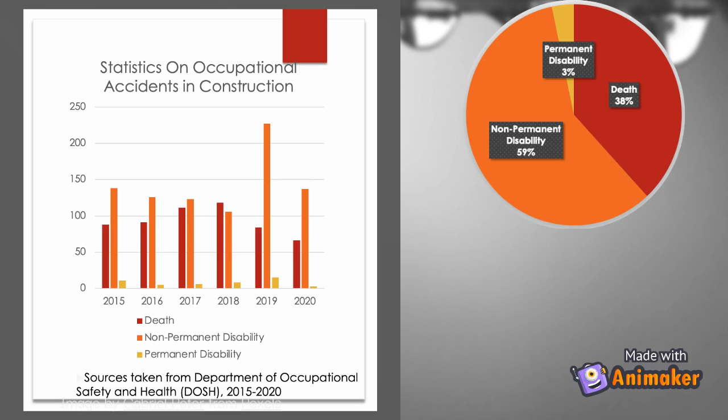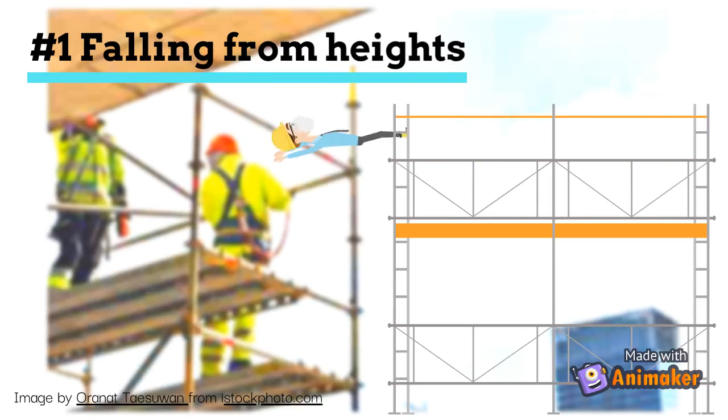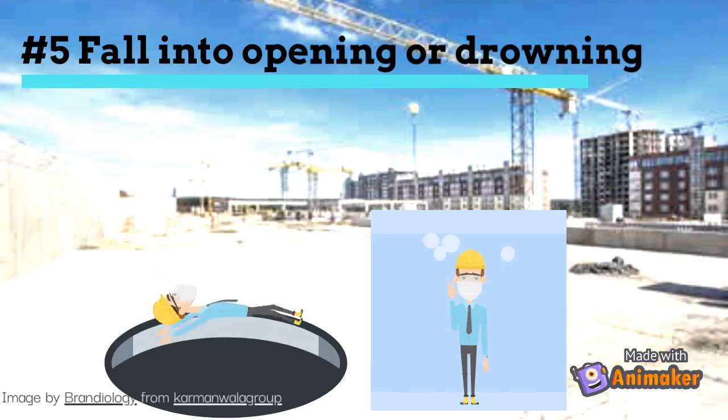These are the 5 most common construction accidents in general, sourced from the DOSH report. Firstly, falling from heights. Secondly, struck by falling objects. Thirdly, struck by moving objects or vehicles. Next, caught in between. And lastly, falling into an opening or drowning.

Here we look at the other 4 common accidents that happen at construction sites, namely electrocution, environmental factors, fire, explosion, and exposure to or contact with harmful substances.

Despite the effort of implementing rules and regulations on site safety according to international standards and guidelines, the number of accidents does not seem to reduce significantly. So what actually are the main causes of construction accidents?

Firstly, workers' negligence. Workers who act carelessly and fail to carry out site works, such as operating machines without observing the working surroundings, may lead to workers being struck by moving objects or vehicles. Workers' failure in taking care of equipment and tools may lead to workers being struck by falling tools from higher platforms. Therefore, being cautious and responsible is important at construction sites to ensure other workers are not harmed.

Secondly, the failure of workers to obey work procedures, especially standard operating procedures when handling machines or entering the construction site. Accidents can be avoided if every worker obeys the stated SOP.

Next, working at high elevation is one of the main causes of accidents in Malaysia. Working at higher platforms such as high-rises, highway bridges, and slope construction has a higher possibility of accidents, and any mistake could cause falling from high elevation. Most fatal accidents happen due to this factor. It is compulsory in the guidelines that workers working at higher elevation require personal protective equipment to ensure their safety, such as safety belts and harness safety lines.

Therefore, a safety management system, which is a systematic way of identifying hazards and managing risks relating to the construction workplace, should be introduced at every construction site to ensure the safety of the workers and to protect the stakeholders as well.

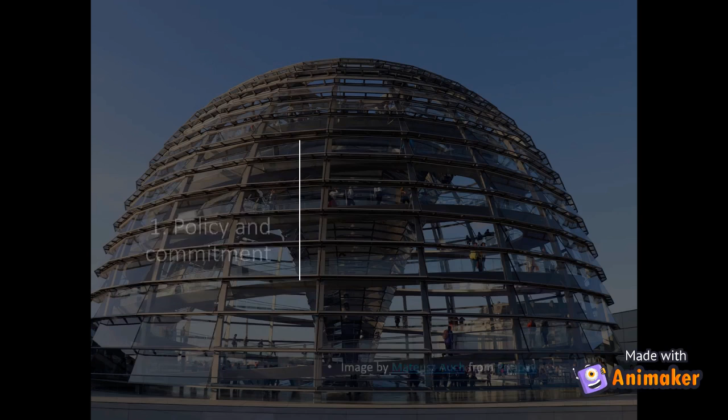Now we will talk about the key processes of site safety management. The first key process of site safety management is the establishment of policy and commitment.

Safety policy is a recognized written statement of an organization's commitment to protect the health and safety of the employees as well as the surrounding communities. The safety policy outlines the measures taken to protect the employees.

The policy shall always prioritize the safety of the workers in all works at site. Commitment from all members of the organization and team in regards to safety and health prioritization, as well as compliance to safety codes, shall be guaranteed 100%.

Safety policy shall minimally be formed with the following three sections: Number 1, statement of the policy, stating the employer's commitment to manage health and safety and stating the goal of the policy.

Number 2, responsibility, which is the appointment of a responsible manager and his team to implement, enact, and track the implementation of each element of the safety policy.

And number 3, outlines of detailed procedures or standard operating procedures (SOP) of all forms of works where hazards are involved. As there are many safety policy and procedure modules involved, some of the key ones may include confined space policy and confined space entry procedures.

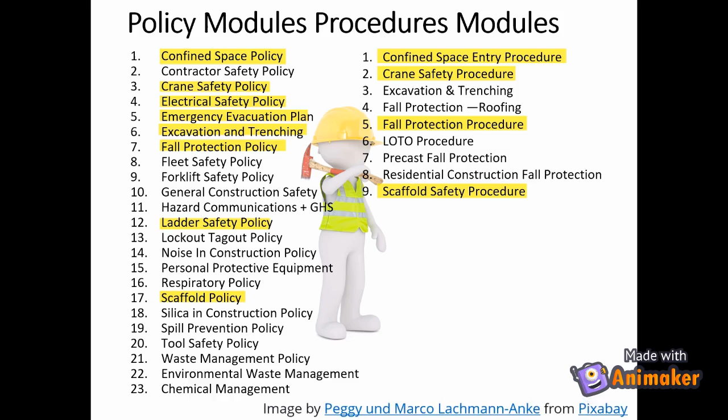The second key process of site safety management is planning. While the safety policy and SOP in key step 1 may be standard across several projects in the organization, a detailed plan formulation is required to fulfill the safety policies.

Some of the key information that needs to be sorted out during the planning stage of the site safety management process may include, but not limited to, the following: A, the nature of the project and its risk levels.

B, the available site topography drawings and structural information. C, a soil test result.

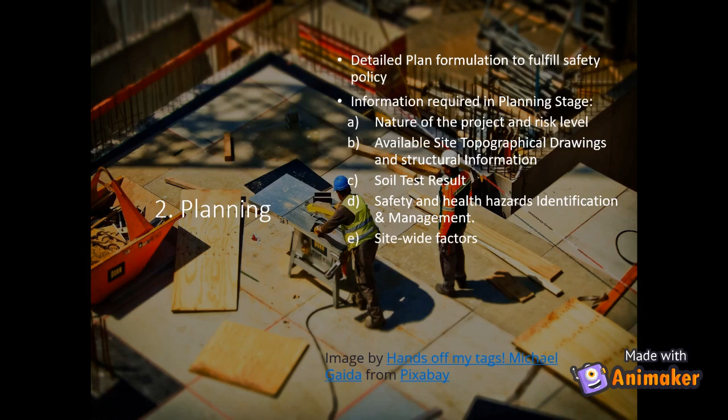D, the safety and health hazards identification and management. E, site-wide factors such as the nearby schools, terrains, railway or infrastructure, etc.

The information of the planning shall mainly be derived from the client, who owns a specific description of the site hazards or surveys, or the designers or engineers who assessed the risk of the site during their design and needs to cascade the necessary information to the main and subcontractors.

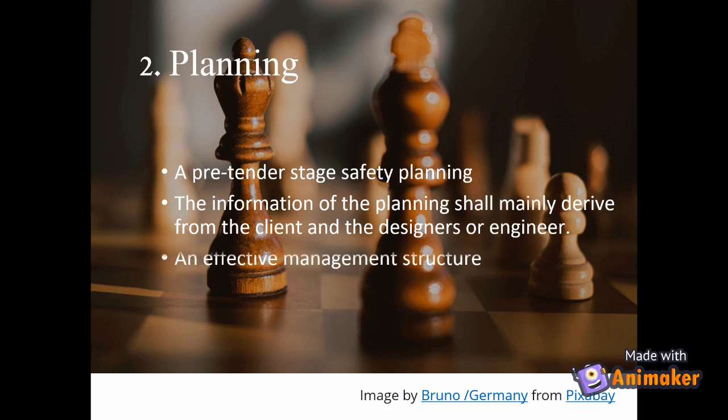An effective management structure shall be in place for the deliverables of such policies. The planning stage shall also consider the investment in technologies for effective site safety management, such as real-time monitoring sensors and controllers on site.

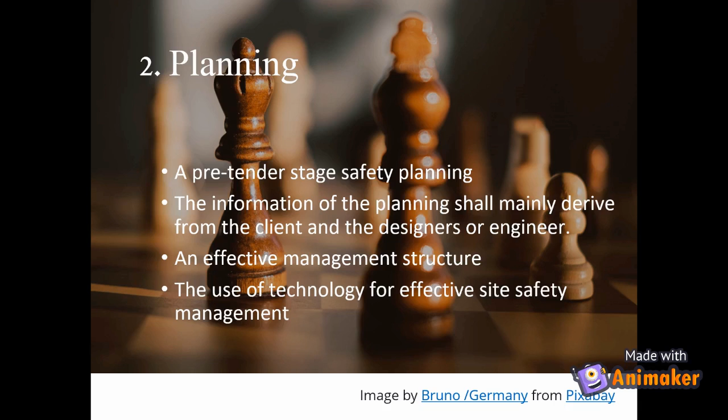Subsequently, the third key process of site safety management is implementation and operation. The aforementioned site safety policy and planning are not just a show of involvement without a proper implementation.

The organization involved needs to develop full capability to achieve all the policies, objectives, and planning that is laid out.

Motivation of all site workers shall be done on a regular basis with safety toolbox meetings and the celebration of accumulated safe man-hours at site. This motivation shall encourage the prioritization of long-term health and not just merely to avoid accidents.

The provision of personal protective equipment (PPE) suited for all types of site conditions shall always be applicable. All actions deemed inclusive in the planning stage, as well as all known safety regulations, has to be carried out.

This is to minimize and eliminate risk, and no omissions of such is allowed to save cost at the expense of safety and health.

The assigned safety officers and his team must be properly empowered to enforce site safety compliance at all times.

Last but not least, the final key process of site safety management is measuring and auditing of performances. In other words, measurement, monitoring, and evaluation of site safety and health performances.

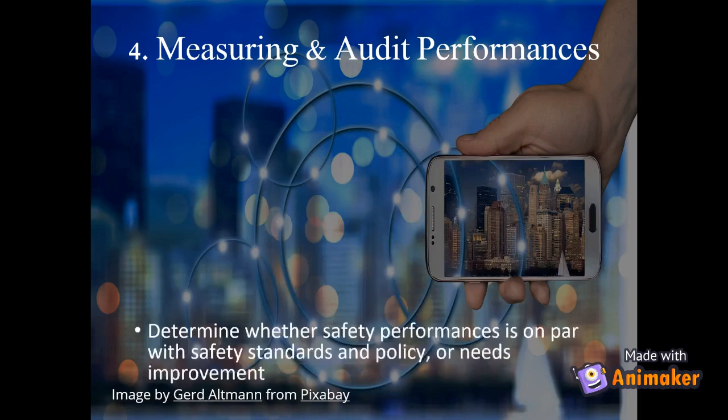The safety performance shall be measured to review when and where safety standards needs an improvement. This process is when the use of technologies may prove to come in handy.

Active self-monitoring system with sensors shall replace human inspections, which may not be as comprehensive and error-free as the technology may do.

Sensors coupled with image processing neural networks can collect data of safety compliances and feed to a controller to analyze safety compliances at all times.

More details about site safety monitoring with the aid of technologies will be presented in the subsequent sections of this video.

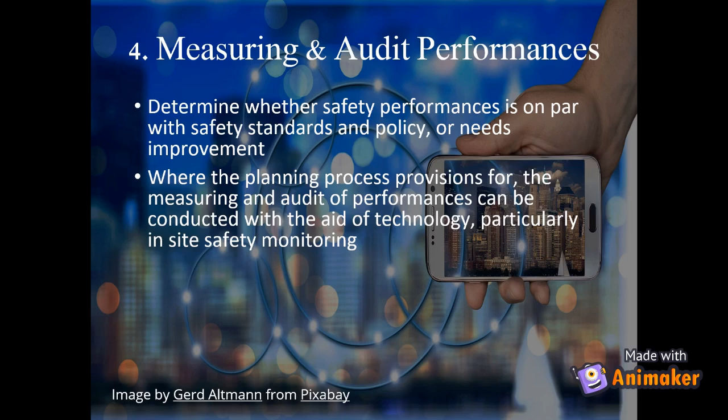In the near future, heavy equipment shall minimally be equipped with central monitoring to ensure that the operators are using them correctly. Otherwise, an alarm may be triggered to notify the misuse to the operators. The master controller may even generate a safety scoring for the project team in terms of safety and health compliance.

Afterward, a systematic review of the analysis based on the collected data and independent auditing needs to be run regularly. Next, post-analysis actions include compliments in various forms offered for excellent records of site safety compliance, and on the other hand, disciplinary actions against any misdeeds shall be fairly administered to ensure all workers participate in full commitment.

Should an accident happen, immediate investigation into the cause and effect of the accident needs to be generated and cascaded across the project team. Preventive and corrective actions need to be undertaken immediately. Section 80 of the 2005 Act on Liability of Directors and Officers of Undertakings necessitates the organization to be in a position to proactively manage safety and health of their workers.

Now, let me bring you to see how IoT integration can produce a safer construction site. It overcomes loopholes in safety monitoring, having real-time insights on employees and machineries, and also managed with greater precision and minimal human involvement.

The first IoT device I'm going to bring to you is Radio Frequency Identification, RFID. An RFID tag is fixed to workers' personal protective equipment like uniform, helmet, vest, or shoes, along with smart sensors. When workers wear the RFID sensor tag inside, they manage to provide on-site safety data by capturing images on-site. RFID readers are placed in strategic checkpoints to read the safety tracking information detected from sensor tags.

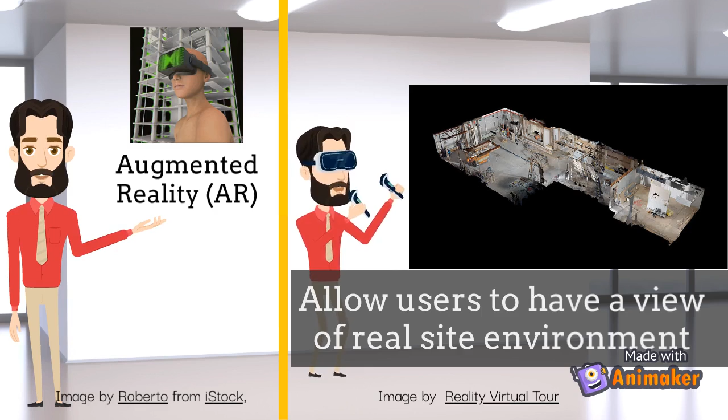Last, data visualization in augmented reality, AR. Data visualization methods allow users to view the real site environment and also help identify safety problems that may be or are currently faced by an employee. IoT devices capture data from the physical construction site so it can be analyzed, and AR devices take that digital data and render it back onto the physical world for people to view and interact with.

How the Internet of Things is changing construction site safety management. First, we can compare on-site management in terms of traditional practice versus post-IoT implementation. In the past, management had problems with a lack of accurate information regarding safety management, but now, with IoT, this is no longer the case due to real-time safety risk assessment.

Besides, IoT has improved information delivery and storage. Before, management had issues with late data collection, which resulted in delays and limitations in decision making, impacting the safety of management and employees. Therefore, risk evaluation and accident prediction will help a company eradicate this issue.

Traditional practice in construction site safety often avoided sharing information related to site safety with agencies and companies involved, in order to conceal unforeseen accidents while maintaining the good name of the company. But this behavior gambles with the welfare of employees on site and can be categorized as poor management. Therefore, IoT implementation will help improve safety management.

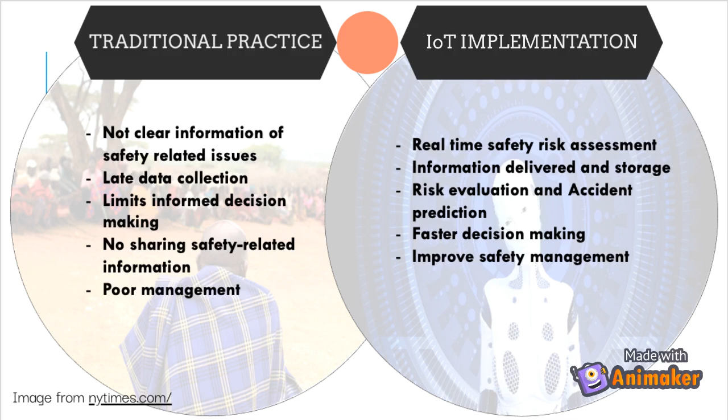Internet of Things implementation improves on three concepts. The IoT paradigm is the product of the fusion of three concepts: firstly, things-oriented vision; secondly, internet-oriented vision; and thirdly, semantic-oriented vision.

The things-oriented vision examines how to incorporate generic objects within a shared context. IoT can thus be seen as a mechanism for autonomous data collection, event conversion, network connectivity, and interoperability. The internet-oriented vision guides a network-oriented concept, allowing for the connection of a vast number of communication devices. Finally, because of the enormous number of objects involved in the future internet, semantic-based vision plays a critical role in overcoming the issue of coping with the massive amount of knowledge provided by IoT.

Major advantages of Internet of Things you must know. IoT technologies can be utilized to optimize the systematic process of business. The new generation of IoT-based, situation-aware computing applications were found to be beneficial in solving communication problems in dynamic site conditions.

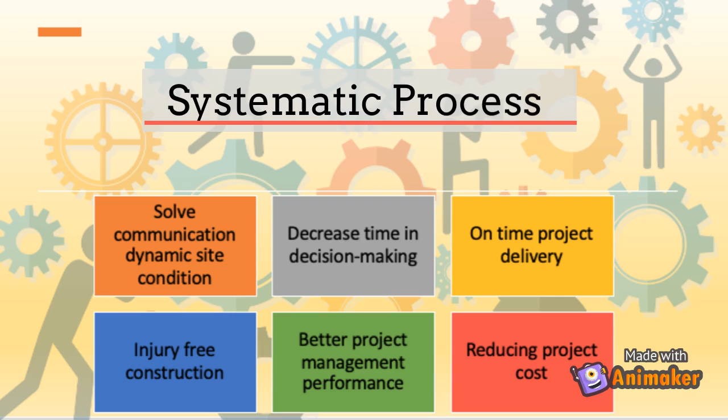Advantage of Internet of Things in modeling. The result of implementing IoT in a modeling platform has some significant contributions. Introducing a multi-dimensional IoT helps achieve real-time visibility and traceability in prefabricated construction.

Besides, smart construction objects that collaborate with IoT to ease operations were presented. A multi-dimensional BIM platform was created to provide opportunities for stakeholders to share information. Lastly, through the proposed platform, a better monitoring process was provided for the end user.

Last but not least, an advantage in construction safety management is that site employees get notifications of possible hazards in real time. Hence, it helps management reduce site construction accidents. Secondly, it provides an index of possible risks for review and general site safety progress.

The seamless incorporation of disparate sensors is in IoT middleware. Lastly, IoT also has the advantage of low-cost, dependable implementation with a low-power energy harvesting scheme.